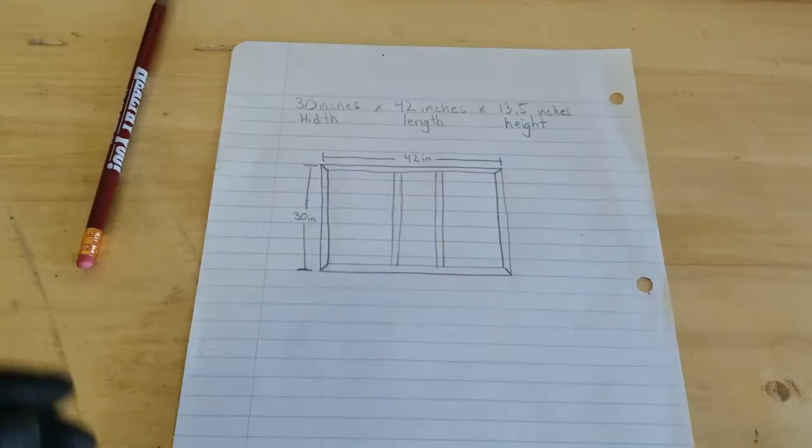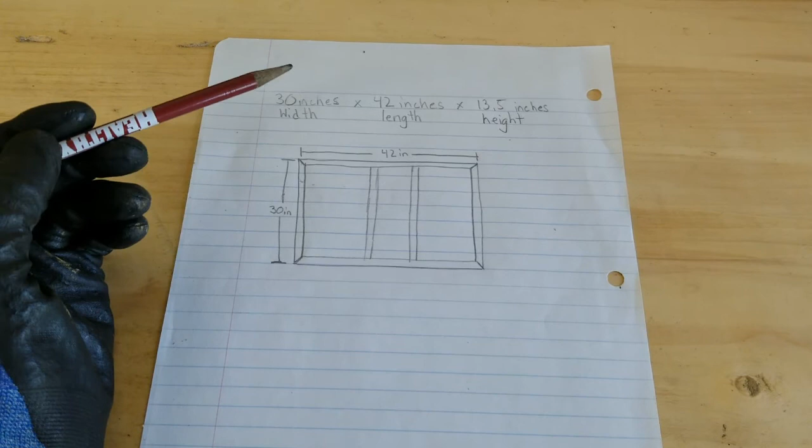So I drew this rough drawing to show you what I'm thinking about, and it's going to be 30 inches wide by 42 inches in length, and I'm going to be using some square tubing, cutting it at 45s on the ends, and then I'm going to be adding in these two little braces here that's going to tie into the bottom of the trailer. And I measured it at 13.5 inches tall, but I might change that around a little bit, not too sure about that. But now I gotta go find and dig out some square tubing.

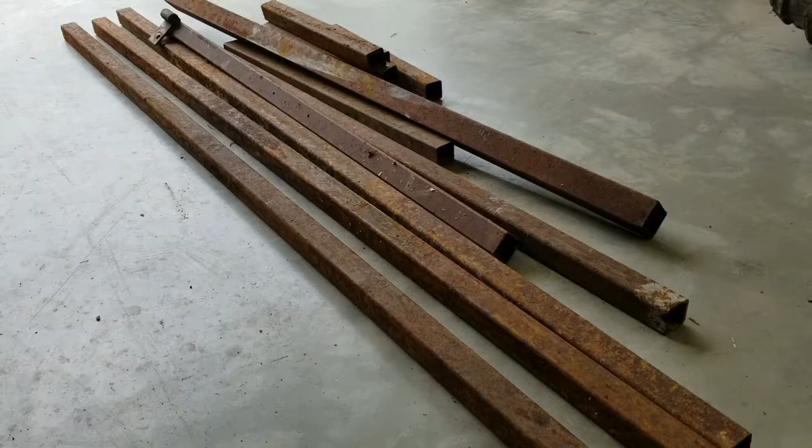So I got all that square tubing laid out here, and it's 1 1/4 by 1 1/4 by about a 1/16 of an inch thick, so it should be strong enough. And I think I got enough of it here to do the frame of the box. So I think now I'm going to start laying this stuff out and cutting it up.

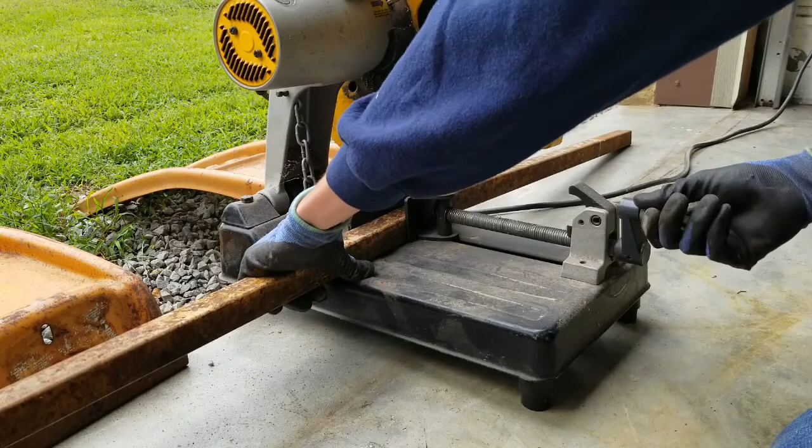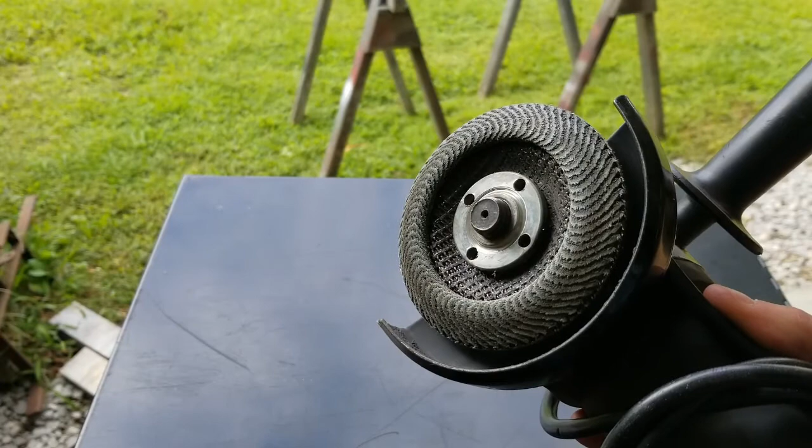So I think I'm going to start removing the rust off these pieces of square tubing, and to do that I'm going to be using the flap wheel on an angle grinder to remove all the burrs from cutting them on the chop saw. And then I'm going to go back over it with this Gorilla pad. This is to remove all the rust and the scale off of them. There's not much left of it, but hopefully it'll last long enough to do all 4 pieces that I have here. So yeah, let's get to it.

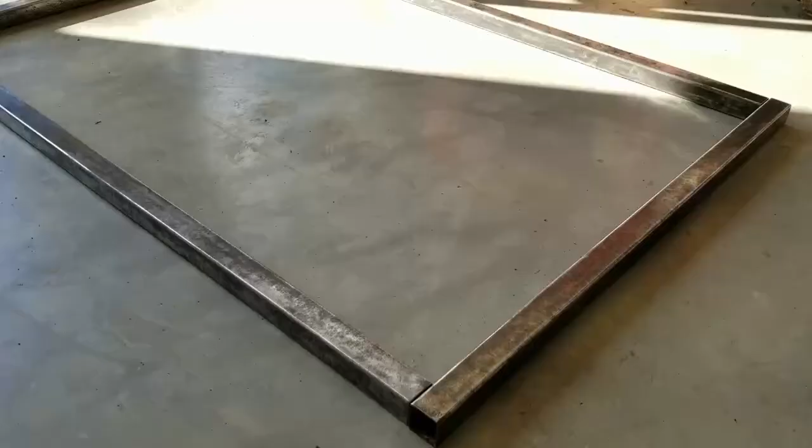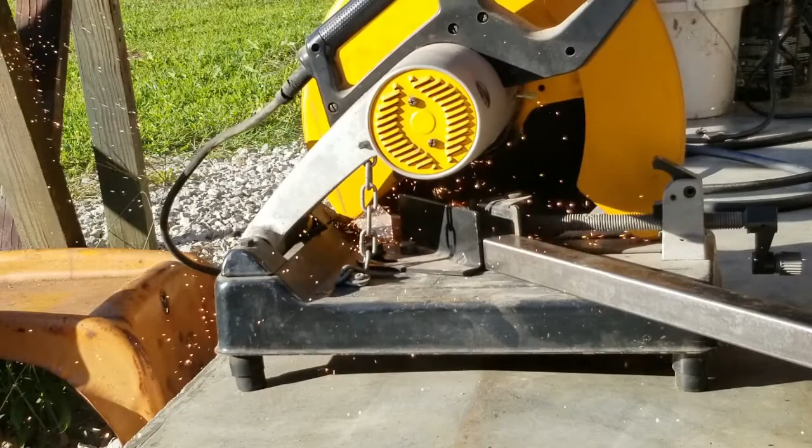So I got all these pieces cleaned up, but now I'm gonna basically put 45s on these pieces here so I can butt them up and weld them together. So I've got this thing set up on 3 pieces of angle iron, and I've got that piece of angle iron right there clamped in there so it can't twist. And the reason I've got 3 pieces of angle iron is because when you use 3 of them, it doesn't have a choice but to be level pretty much.

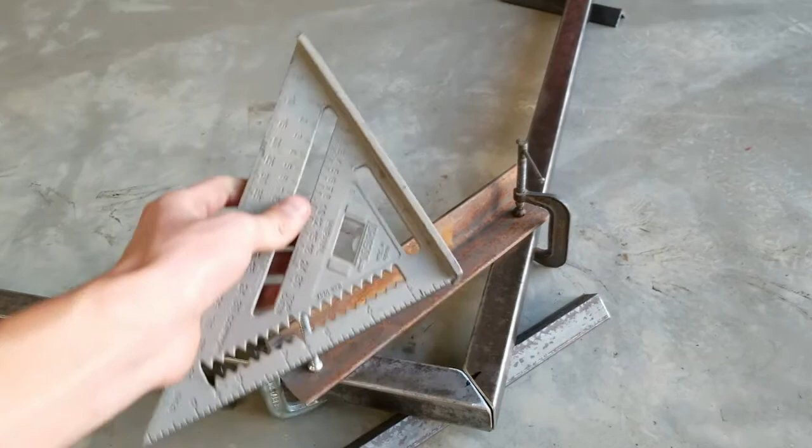And I'm only going to do half of it at a time, and then I'll do the other half, which is sitting right there, and then we'll put those 2 together and just kind of tack it up first and make sure everything's square and flat. And got a square here, and looks pretty good. So I'm going to tack this up, and then I'm going to move on to the next one.

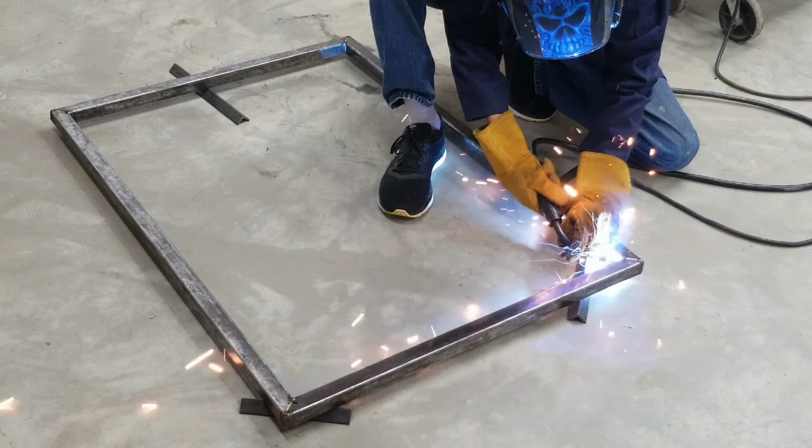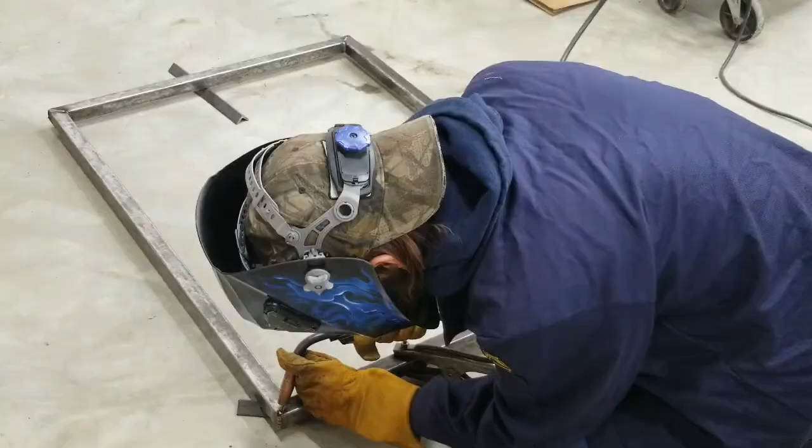So now that I got that frame all welded up, I think my next step is going to be taking this old box off and putting that new one on and kind of mocking it up and seeing how it looks and how I'm going to mount it.

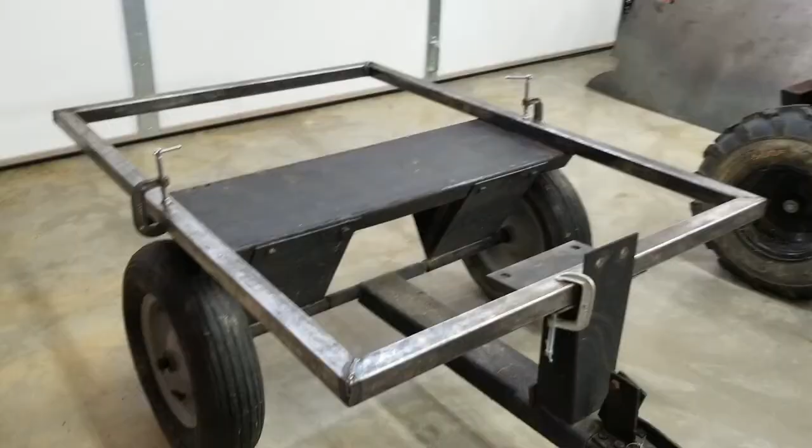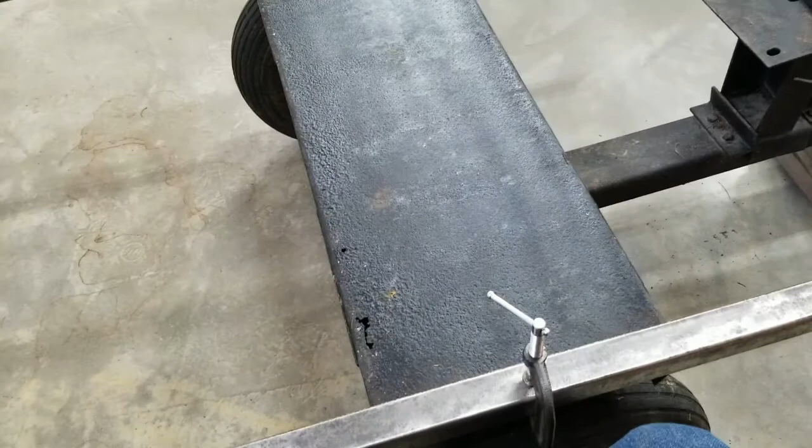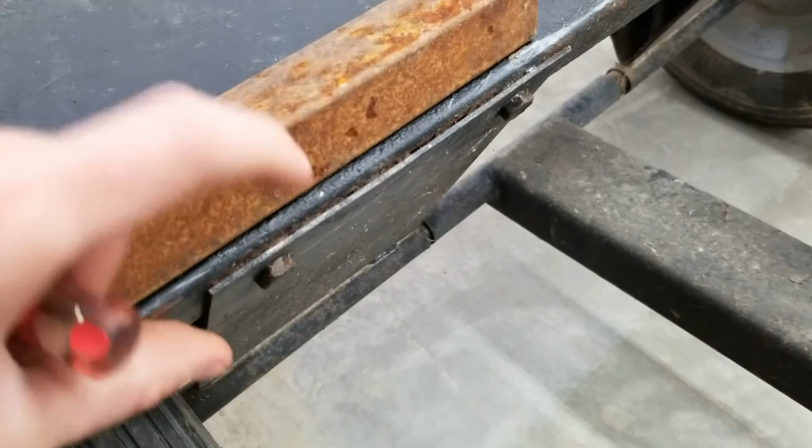So I got that frame all mocked up and sitting on there, but turns out this piece right here is starting to rust out. It ain't gonna last very long, so I think I'm gonna do away with it and do something different. I was gonna put square tubing here. Obviously this one isn't long enough, but I was gonna put square tubing between these 2 and then just bolt to this. But instead I think I'm gonna have to figure out a way to weld something on the square tubing to bolt to these supports here.

I could just weld these to it, but I kind of want to keep it to where you can take it all apart in case you need to do something. So I think I've got an idea, but it's kind of hard to explain. So I'm just going to start cutting and welding, and y'all will figure it out as I go.

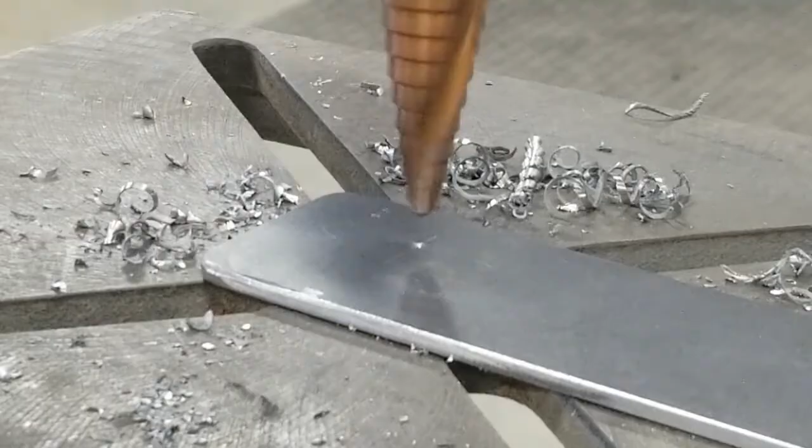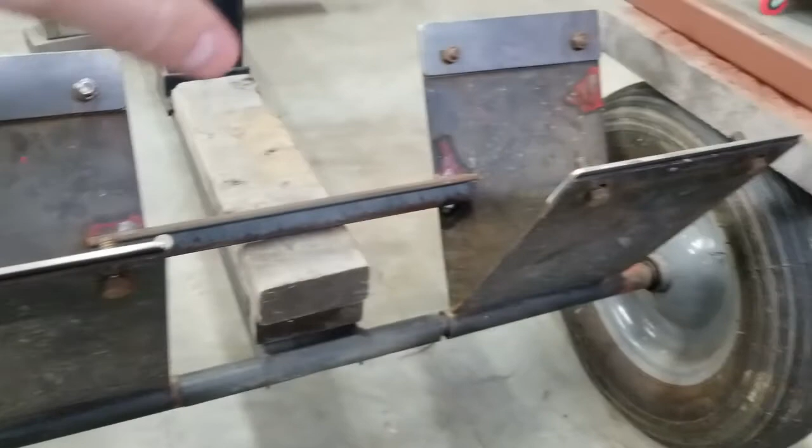So before I start welding this thing together, I thought I'd go over a couple things and kind of show you what I'm doing. You saw me make these brackets here, and I got 4 of them. And as you can see, they stick up about 1/4 of an inch above the original uprights, and that's what I wanted because I'm going to have square tubing, and it's going to sit right on top like that, and then I'm going to stitch weld it together.

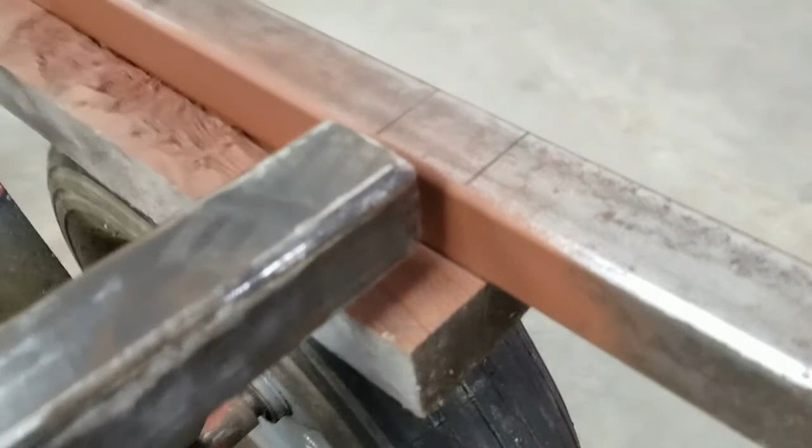And then you can see I have on the frame here, I have some lines marked out where those pieces of square tubing are going to go. I'm going to have 2 of them. And then as you can also see, off camera I tacked in this piece of angle iron here, and what that did was it set my distance between these 2 pieces here and here, these uprights or these supports. And I didn't want them to be spreading apart or twisting on me while I was trying to square everything up and get it tacked in and welded in.

So now that I've got that all done, and I've got that piece right here, this support up front all squared up and everything, I think I'm ready to start welding in these pieces of square tubing here. And then after that, I'll get this taken apart some more and get these uprights tacked in and welded in solid.

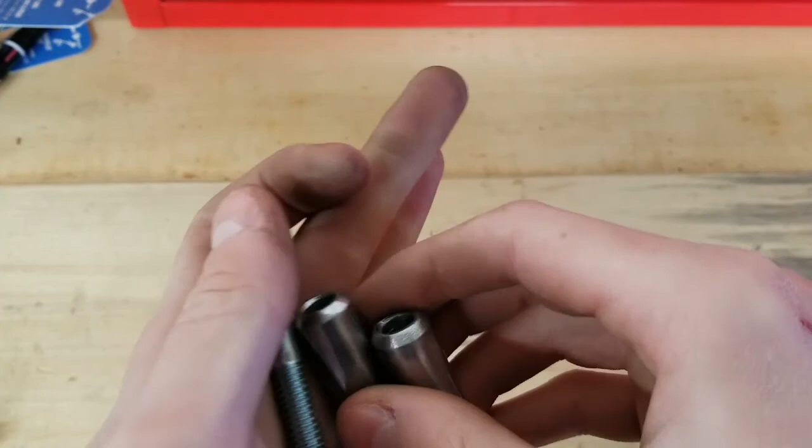So I made two of them here, and I made it out of, I believe this is an oil pump drive shaft from a Kohler Courage engine, and I cut it down, and then I had to drill out the inside a little bit to 5/16, and then I went over to the bench grinder and just beveled the end real good, and that's going to give me a good place to weld. So I'm going to insert these into the frame and we're going to weld it up.

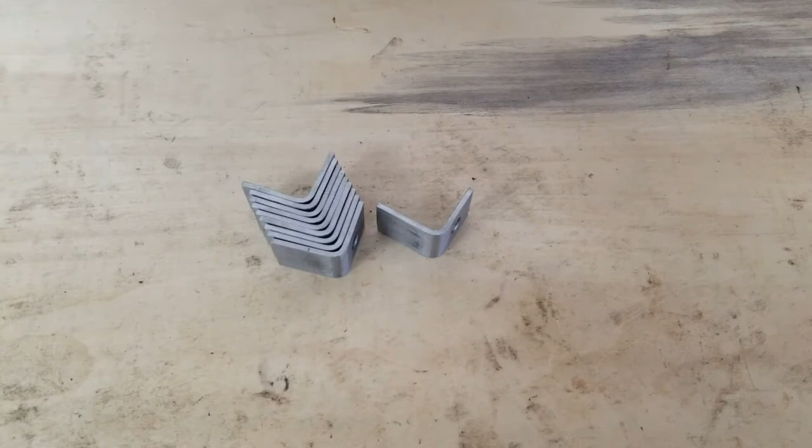So you just saw me cut out and make these tabs here, and these are going to get butted up to the frame like so, and I'm going to weld them on there, and that's going to give me a place for my wood to mount to.

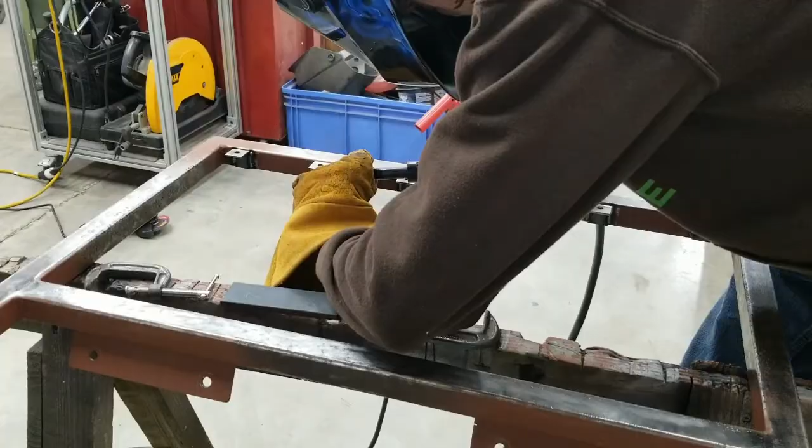So now that I got those tabs all welded on, I cut out some pieces of angle iron here, and they're going to get welded up like that, and that's going to give me a place to mount the boards that go on the side. So I'm going to work on drilling some holes in these pieces of angle iron here and get them all welded up.

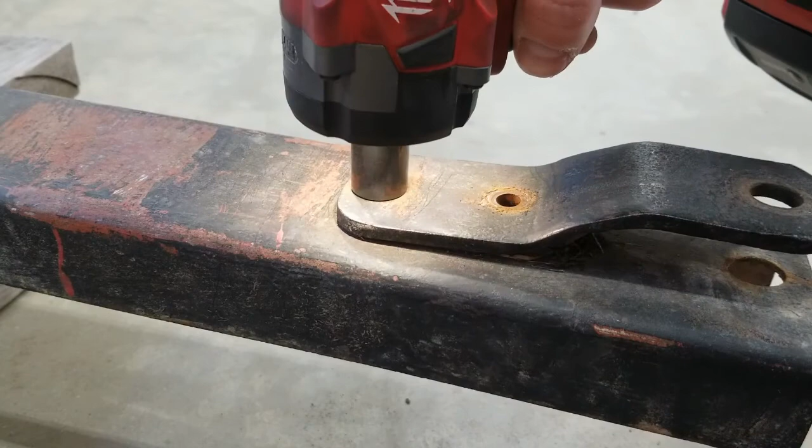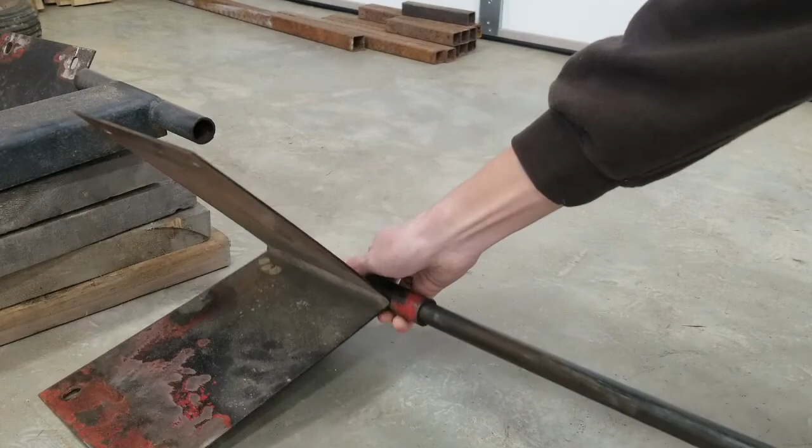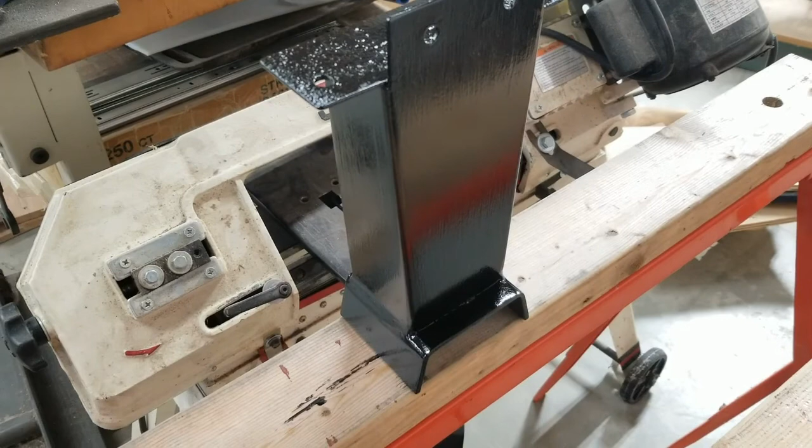They're all done here. And then over here by the heater, I have some things currently drying. I have the front support there. And then right down there, that's the mechanism to make the bed dump. And right there, that's part of the hitch. So once all these parts are done drying, I'm going to start putting this thing back together.